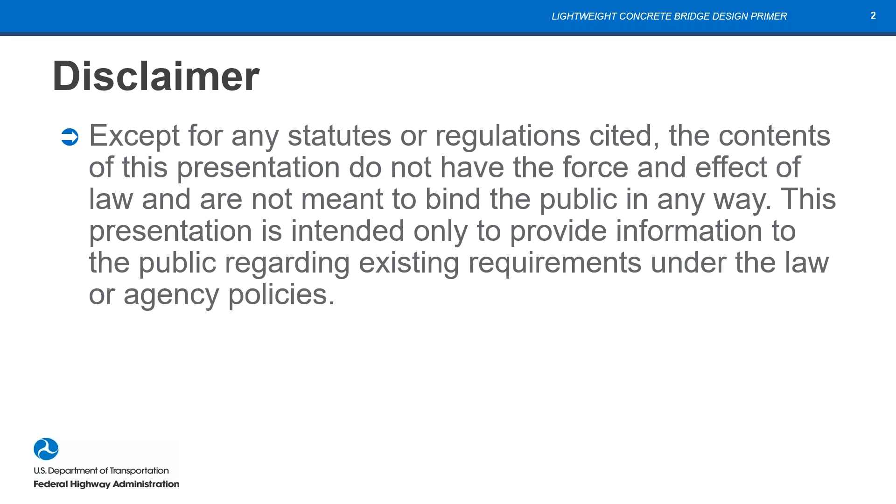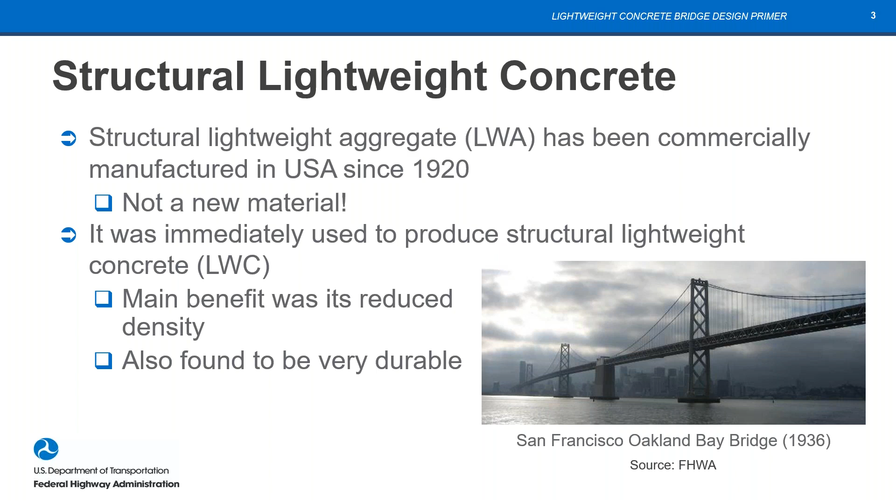So let's talk a little bit about lightweight aggregate. It's a manufactured product, so this is not something like lava rocks that you might have in your grill outside, where they just dig it out of the ground and crunch it up, and that's what you get. In this case, what we're talking about is a raw material that's either shale, clay, or slate. You may have to blast it and get it out for the harder materials, but clay, they can just dig it up.

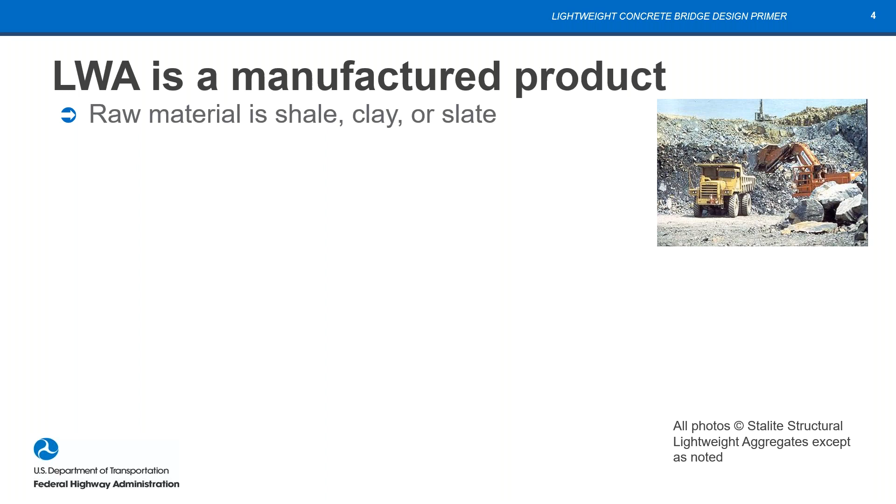So you use those as the raw materials, and then we heat them in a kiln. You can see the rotary kilns indicated by the arrows there. There are a couple of them at each side. Those kilns have the raw materials coming in from the top end, and it rolls down to the bottom.

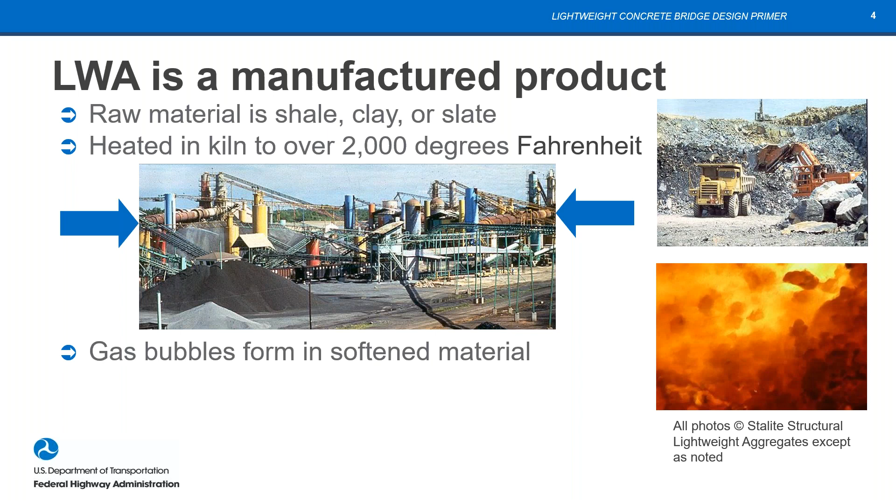They're over 2,000 degrees Fahrenheit down at the low end where the flame is. So the material's getting heated up. It softens, doesn't melt, but it softens, and gas bubbles form in that material as it's softened, and then the gas bubbles remain after cooling.

And you can see them here. It's a porous surface that you can see on the aggregate particles. The clinker is then typically crushed and screened. So that's how we get our lightweight aggregate.

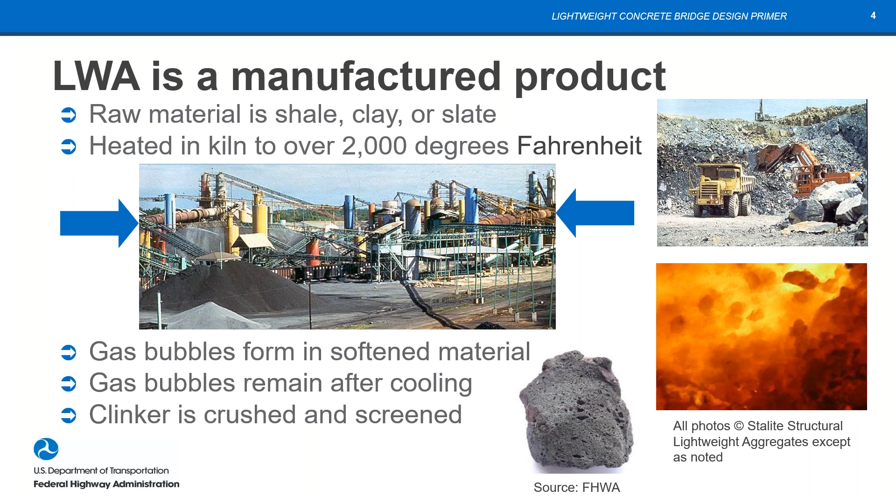Lightweight aggregate was developed back 100 years ago, and the process was patented. Then in the 1950s, that patent expired. At that time, the use of lightweight concrete and lightweight aggregate increased rapidly as other manufacturers came in.

The rapid growth continued well into the 70s, at which point we had an oil crisis. With the heating that was required for the aggregate to be manufactured, that meant the price went up on what was being used, either oil or coal.

The Environmental Protection Agency also began working in those days, and pollution controls were then being required to be placed on the kilns, and that increased production costs. So things changed markedly in the 70s, and there was a significant contraction in the market.

About half of the deliveries went away, and as a result, industry production was reduced, promotion was reduced, and then it became sort of constant at that lower level, and we really didn't have much production or promotion of the material after that point. Prior to that time, they had a newsletter and a lot of things where a lot of information was going out about lightweight concrete.

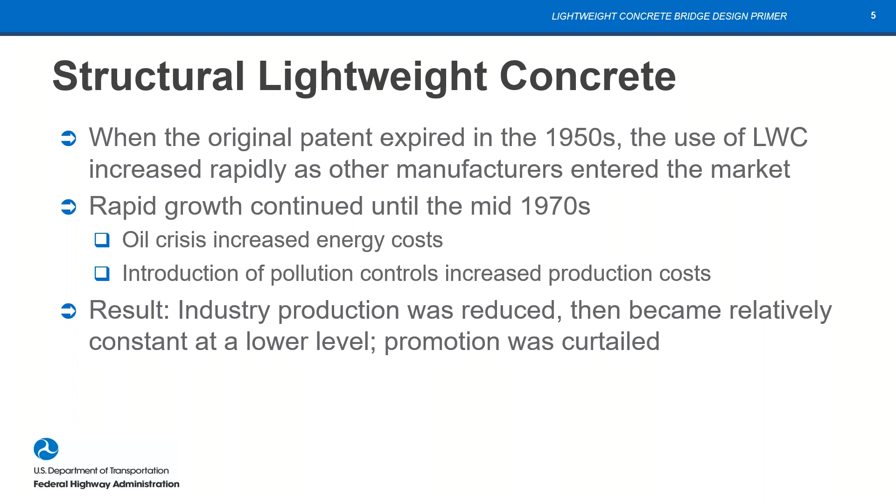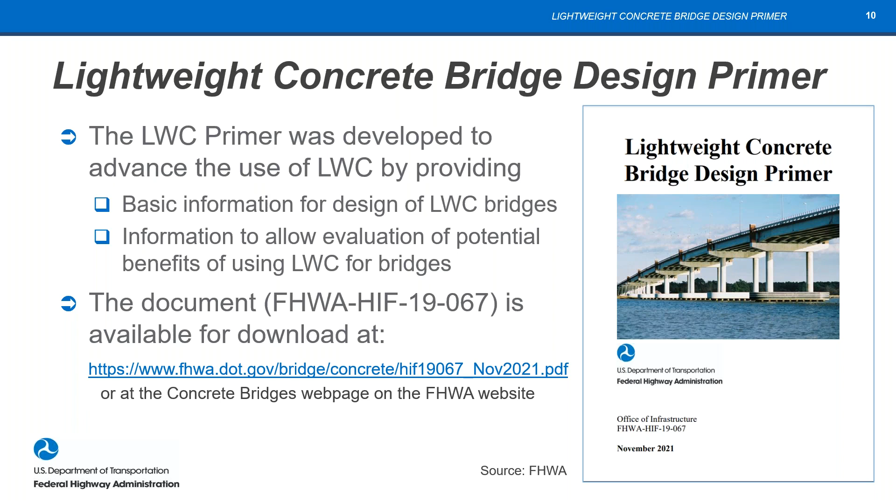So it's a bit longer than what you might think of for a primer. It's about 133 numbered pages, but there was just too much good information. I've been collecting information about lightweight concrete for a good while, and I wanted to share it, so I put more in here than normally we'd have, but hopefully it will be of value to you and others over the years.

I'll spend a little more time on chapter 7, where I'll introduce a few of the bridge projects for which lightweight concrete has been used successfully. I won't go into chapter 8 today. Normally I wouldn't anyway, because it's references, but there are over 160 of them, provided to give you more information to supplement the primer. You can chase those down to get more information about the projects or material properties or whatever you're interested in. So I'd encourage you to use those.

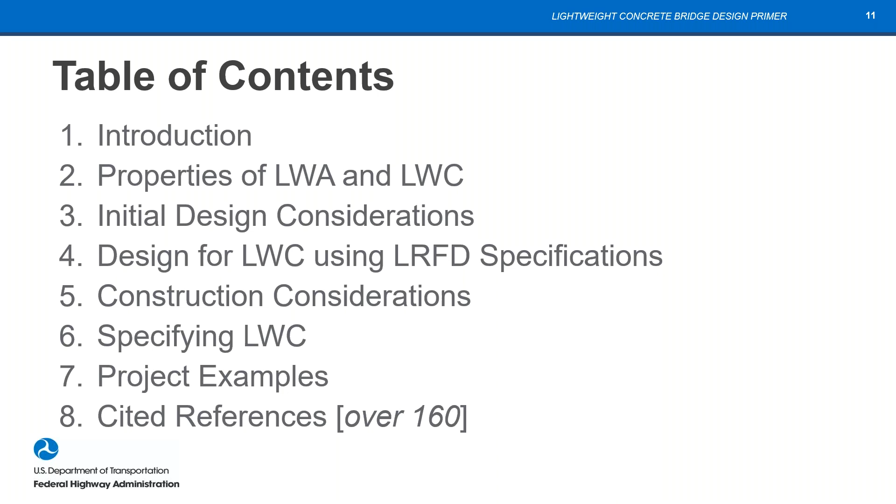So now we'll jump into the introduction.

We've already talked a little about lightweight aggregate and how it's made. As far as lightweight concrete, this is the definition from the AASHTO LRFD: lightweight concrete is simply a concrete that contains lightweight aggregate, conforms to the AASHTO spec, and has an equilibrium density not greater than 135 pounds per cubic foot.

It also gives you the specs used to compute or determine the equilibrium density. Equilibrium density is defined in ASTM C567, roughly, as the density of structural lightweight concrete after exposure to a relative humidity of 50% and a temperature of 23 degrees C for a period sufficient to reach constant mass. So it's essentially a dry density of the lightweight concrete.

What happens is that the lightweight aggregate is pre-wetted before it's batched, so it has extra moisture that can get away. That moisture weighs something, so as it leaves the concrete, if it's not bound in the cement, you get a reduction in density. That's why we talk about equilibrium density. We used to talk about air dry density, but that's not defined in any test methods anymore, so we shouldn't use that term, but rather equilibrium density. That's also discussed back in chapter 6, where it covers the specifications.

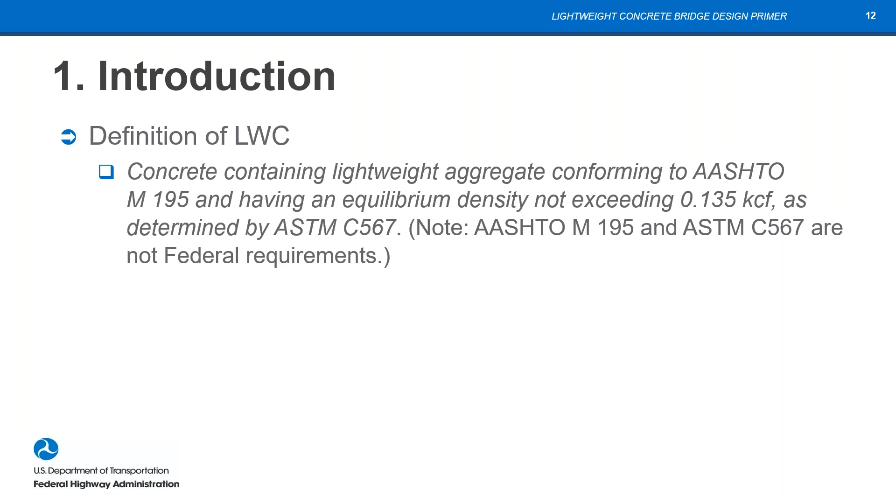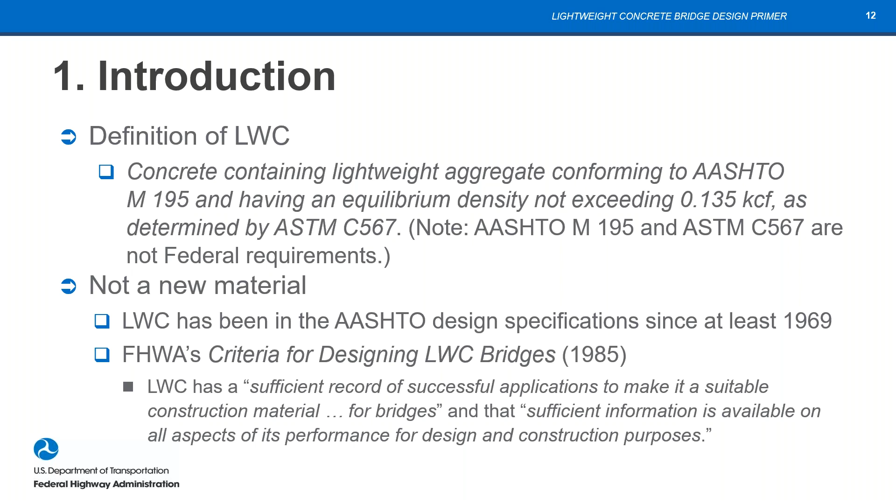Just want to reemphasize that lightweight concrete is not a new material. It's been addressed in the AASHTO design specs since at least 1969. There was also a study funded by FHWA and performed by T.Y. Lin International, published back in 1985. Here's a quote from that report showing that even back in 1985, there was enough information available, and lightweight concrete had been successfully used, so it's a suitable construction material for bridges. That's important and again emphasizes that this is not a new material.

Moving on to topics in chapter 1, there's a list of benefits for lightweight concrete. We start with structural benefits, related to design efficiency for the superstructure and the supporting elements. Examples include extending span ranges, wider girder spacings, and shallower girders. Oftentimes, making a lightweight deck will give you increased spans more than simply using a lightweight girder.

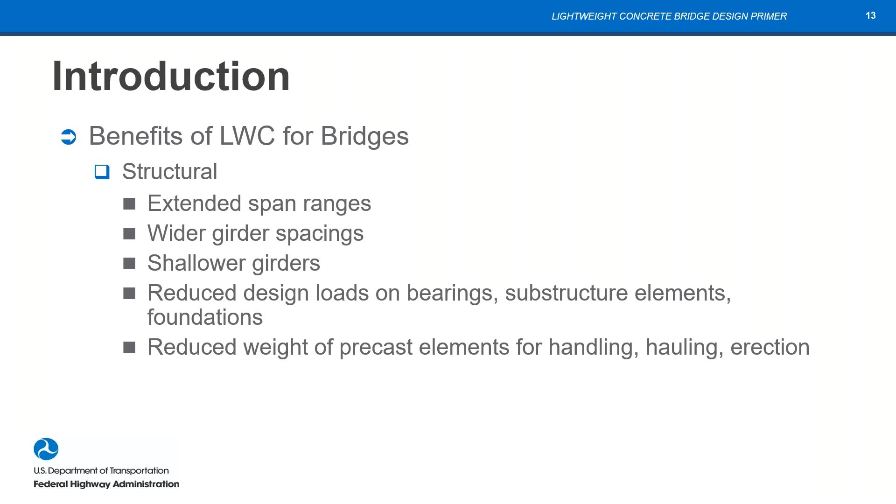Also, we have improved efficiency because of reduced design loads on the bearings, substructures, foundations, and all that sort of thing. Then there are the benefits of moving precast elements—if they're lighter, it's a nicer thing to do. That's another benefit for handling, hauling, and erection.

But then there's something that's a surprise to many engineers: the durability of lightweight concrete is actually enhanced over normal weight concrete, everything else being pretty much the same. It doesn't seem to make sense that taking a rock with holes in it and putting it into your concrete would make it more durable than using a hard rock aggregate, but there are a number of factors involved.

I can't develop all of that—it's a very interesting topic—but one factor is that the lightweight aggregate is typically pre-wetted before it's put into the concrete, which helps with pumping and other things. It also helps with durability because it reduces shrinkage, therefore reduces cracking, and reduces permeability because at the micro scale there's less cracking around the aggregate particles than you'd see in a normal weight mix.

Similarly, the aggregate is less stiff because it has all those holes in it, so you end up with less micro cracking, and less micro cracking around the aggregates means lower permeability. We also have a lower modulus of elasticity that can reduce cracking due to restrained shrinkage, and a lower coefficient of thermal expansion that also reduces cracking—I'll get into that more in a minute. Especially when you combine the lower modulus and lower coefficient of thermal expansion, which happens when looking at, for example, a bridge deck cooling off after it's begun to set, that can significantly reduce the cracking potential from restrained thermal and shrinkage strains.

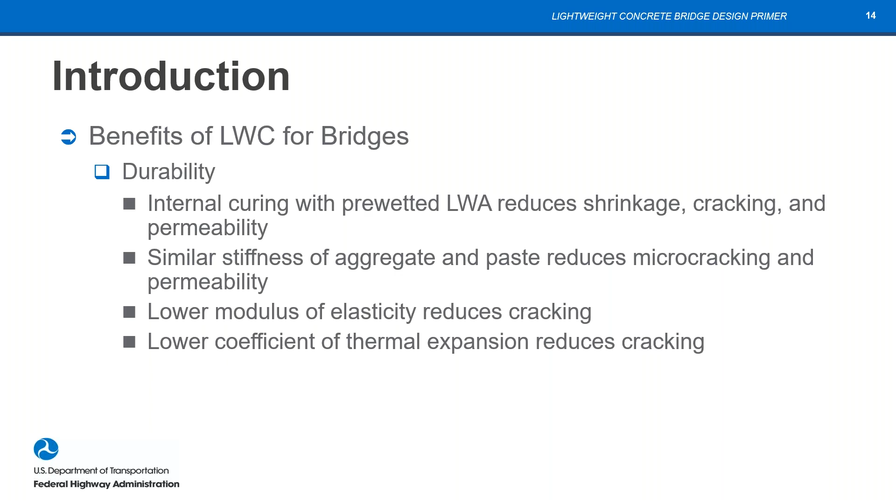There are, however, perceived disadvantages of lightweight concrete, and that's probably why we haven't seen lightweight concrete being used for bridges much more than they are now.

There is the increased cost of lightweight aggregate. You're looking at an aggregate that's dug out of the ground like other aggregate, but then it's fired, and the number of sites where lightweight aggregate is produced is somewhat limited. So there's oftentimes a significant transportation cost involved in getting the lightweight aggregate to wherever you're wanting to make the concrete. People oftentimes think about reduced durability because you've got an aggregate with holes. Surely it can't be as durable. And then you see others, reduced capacity, or probably it must have a reduced strength.

That's not true. And, you know, is it available? And then many contractors are not familiar with lightweight concrete.

However, the fact that we've had many successful projects means that the increased cost is not insurmountable, and other concerns, those listed there, can oftentimes be addressed either in design, or they are simply misconceptions. For example, the reduced durability.

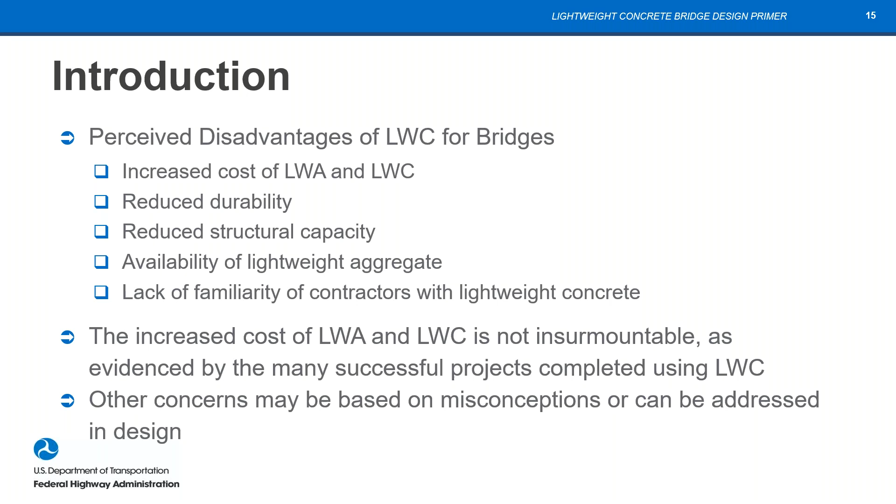I'll give you 3 quick examples of projects on which there's been an effective use for lightweight concrete. One's, again, the San Francisco-Oakland Bay Bridge, another a bridge in Washington State, and finally a bridge in Norway.

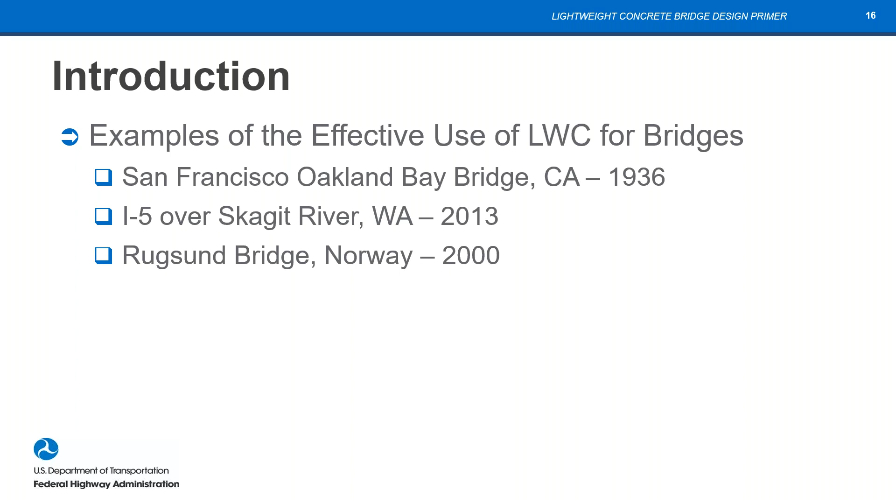There's an article out there by a guy that was involved in the design of this, and he says that using lightweight in that bridge deck saved $3 million out of the original $40 million total cost. That's 7.5%. So it's a significant cost savings for the use of lightweight concrete there.

Then a number of years later, in 1958, the lower deck, which had been for rail and trucks, was reconfigured for the same traffic loads as the upper deck. So it was installed again using all lightweight concrete, and both decks are still in service. Now, both of them have had wearing surfaces on them, but it's pretty amazing that those decks are still in place today.

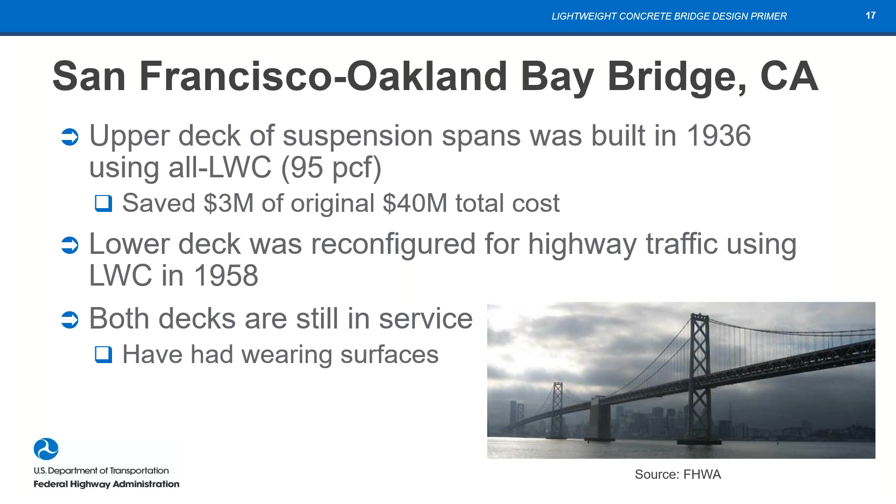Another bridge is the I-5 bridge over the Skagit River near Mount Vernon, Washington, and there was an emergency replacement a number of years back when one of the truss spans got impacted by an overheight load, and it brought down a truss span.

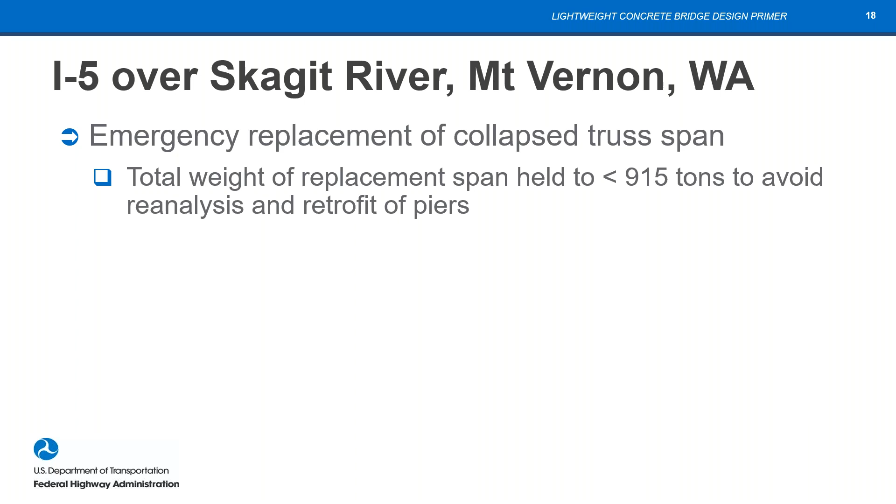The DOT called for an RFP to get it replaced, and said that the total weight of the replacement span, if held below 915 tons, would avoid reanalysis and retrofit of the piers, which is a significant item. So one of the teams proposed using sand lightweight concrete for precast deck girders.

We'll talk about sand lightweight in a minute, but it's not all the way down at all lightweight, it's a little bit more than that, the coarse aggregate's lightweight. So these were the first lightweight concrete girders that had been made in Washington State for the DOT. The design compressive strength of those girders was 9 KSI at 123 pounds a cubic foot.

The actual design strength, if you went through all the ACI statistics, looking at cylinder breaks for a number of projects, it comes in at 10.6 KSI. So that indicates that you can get a high strength design concrete out of lightweight concrete. These girders are 162 feet long. You can see the other details there, but this is a significant project that introduced lightweight concrete up there in Washington State.

Then there's one other bridge I wanted to talk about at this point, and that's the Rugsund Bridge in Norway. It uses lightweight concrete for part of the center span, as an alternate design. There was a design in normal weight concrete, and a peer review process that said you ought to really take a look at lightweight concrete.

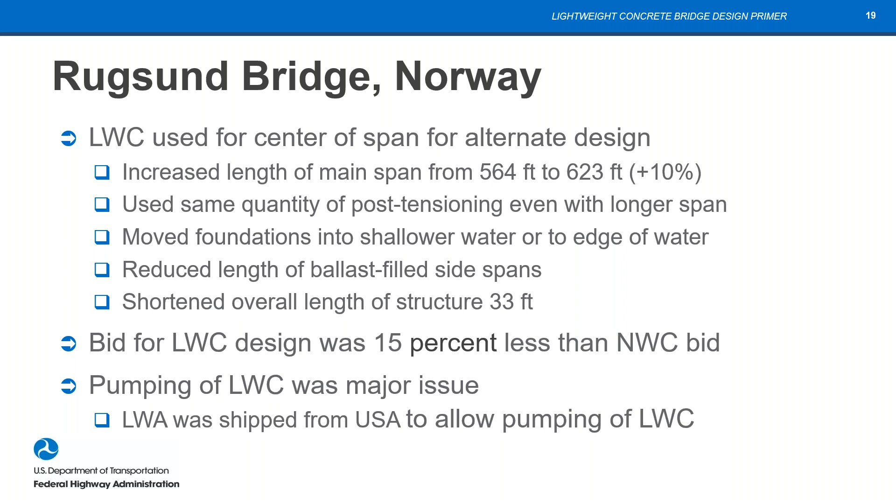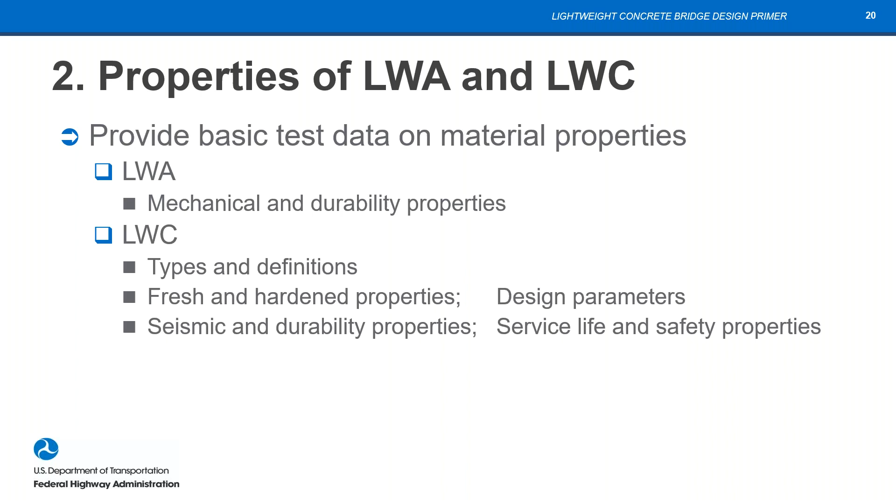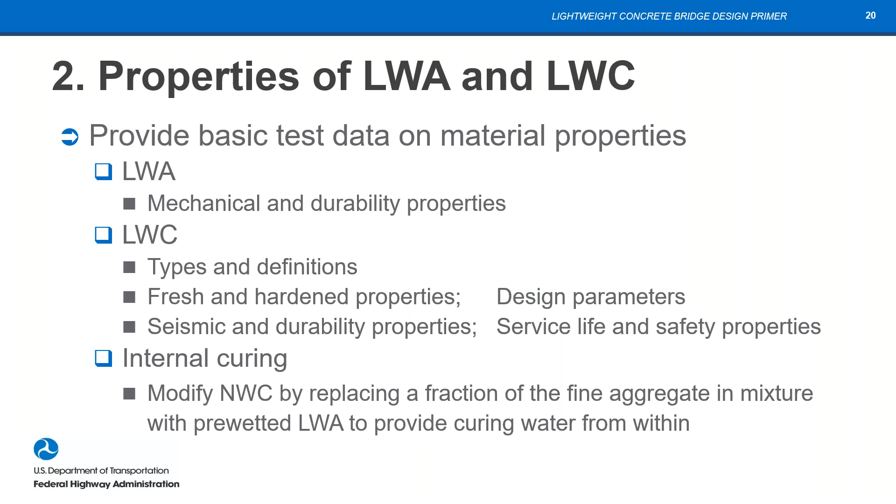So let's move into chapter 2 now and get to the discussion of lightweight aggregate and lightweight concrete properties. We'll begin by looking at the lightweight aggregate properties, and then move on to taking a look at lightweight concrete properties. Finally, we'll have a brief discussion on internal curing, where we're modifying a normal weight mix by replacing a fraction of the fine aggregate with pre-wetted lightweight. Those aggregate particles have water absorbed in them, so as the concrete sets, it pulls the water out of that aggregate and cures the concrete from within, which is a very effective process.

So we have a number of different kinds of aggregate. You can see a picture here from an NCHRP study showing 6 different kinds of aggregate, from different sources like shale, clay, and slate. The properties vary a bit depending on source and processing, just like normal weight aggregate varies from source to source. The lightweight aggregate is typically crushed, but it can be uncrushed. You see in the bottom right photograph an uncrushed, pelletized type aggregate, while this is a crushed aggregate on the right side of that photograph.

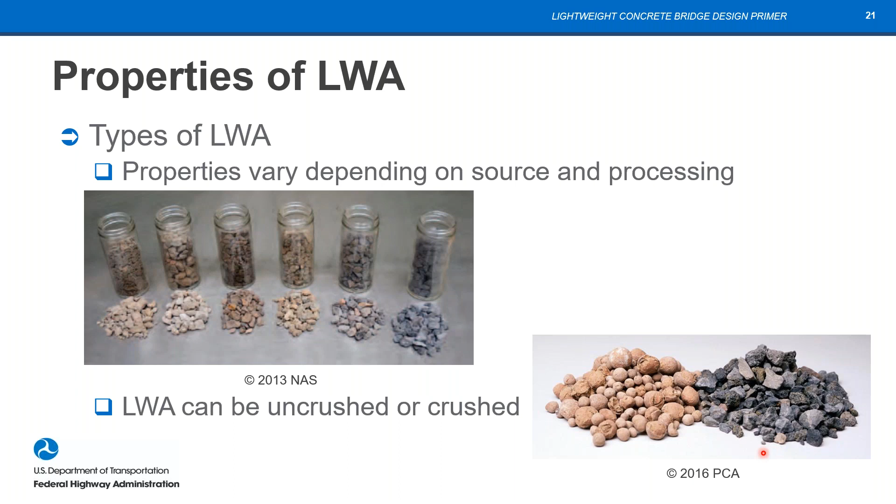The properties of lightweight aggregate, that is the gradation for coarse lightweight, are given in AASHTO M195. This is a chunk out of the table, not the whole table, but it's a piece showing the coarse aggregate gradations. We don't have gradations that are 57, 67s, whatever, that kind of thing. It's just 3/4 inch, 1/2 inch, and 3/8 inch, based on the maximum aggregate size. So there are specifications, just like for normal weight, that specify the gradation and other properties for the lightweight aggregate.

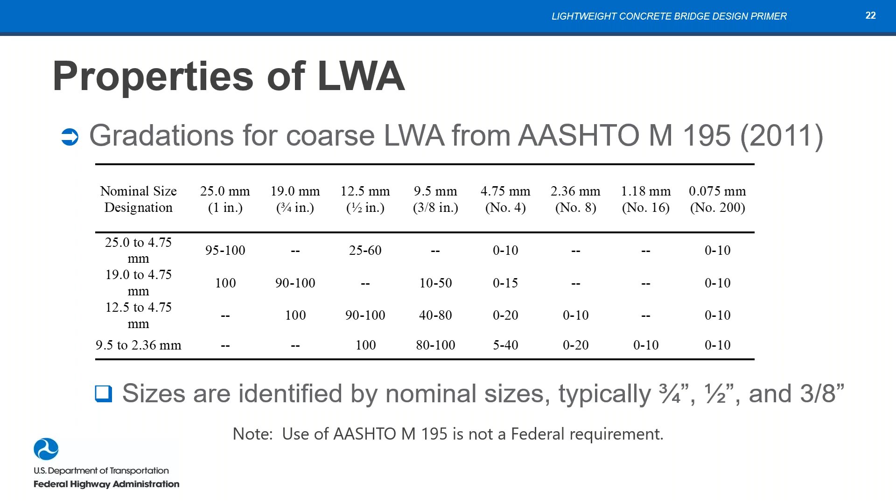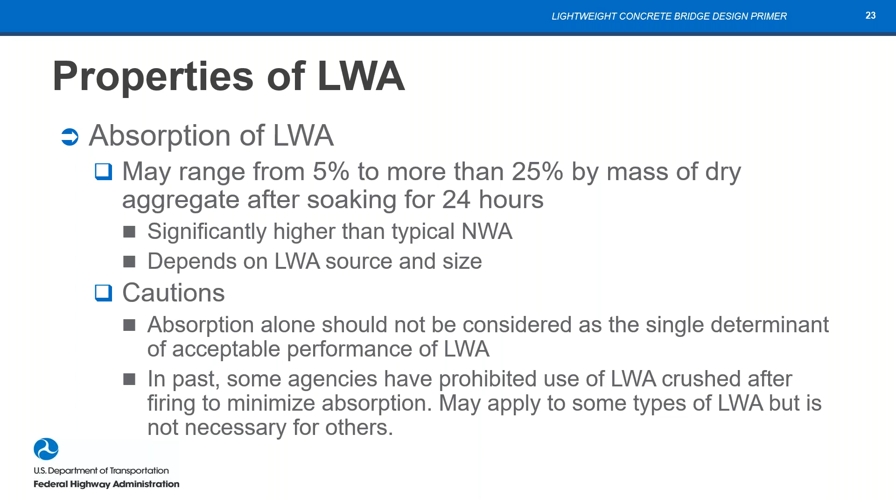There is also a gradation available for fine aggregate. Lightweight aggregate, because it's an expanded rock with pores, has an increased absorption compared to normal weight aggregate. So that absorption may range from 5% to more than 25%, as it says here. It's typically a good bit higher than normal weight aggregate, depending on the source. One caution is that absorption alone shouldn't be the only criteria considered to determine acceptable performance for lightweight aggregate. We need to look at the whole picture. In the past, some agencies may have also prohibited the use of crushed lightweight aggregate. California used to have that in a spec to minimize absorption, but that was for the type of aggregate they had out there. Looking at it nationally, that's not a necessary requirement, and may not even work for that one. But at any rate, it's not something we want to do. So those are some cautionary statements there.

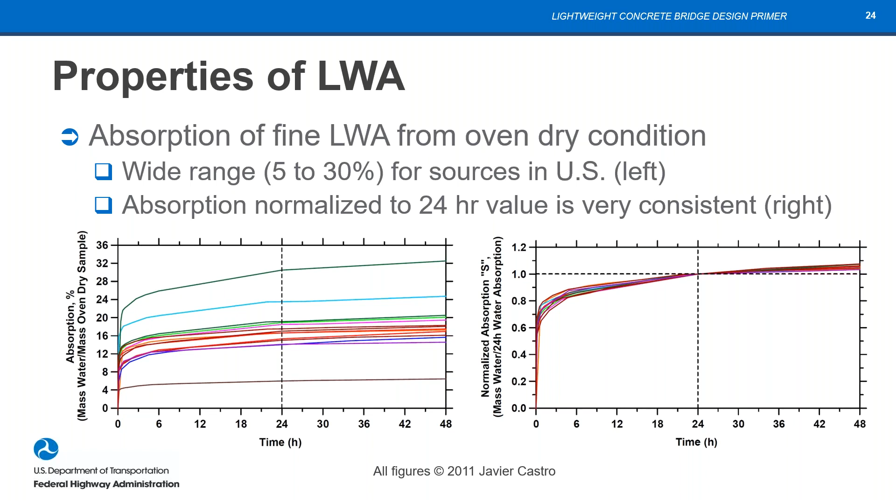Absorption of lightweight fines are shown here in two figures. On the right figure, it shows the mechanics of the absorption are essentially the same. Let's go back to the left figure, which shows the range in absorptions. The bottom line, after 48 hours, 2 days being soaked, is somewhere in the neighborhood of 6-7% absorption, while the top one is up over 32% absorption. So there's a fair range, with a middle ground where most of the aggregate types are. But if you normalize them all by their 24-hour absorption, you see that they all pretty much have the same shape, so they're behaving quite similarly with respect to the rate at which they take up water. The absolute quantities are different, but the relative quantities are the same.

Typically only 20 to 50% of the pore volume of an aggregate particle will be filled. What that tells you is that those pores are disconnected, bubbles totally surrounded by rock, so water can't get to them. We don't really reach a saturated condition, so we don't call it that. We use 'wetted, surface dry' instead. That's just something to be aware of, that the empty pores don't all fill up with water when you soak lightweight aggregate.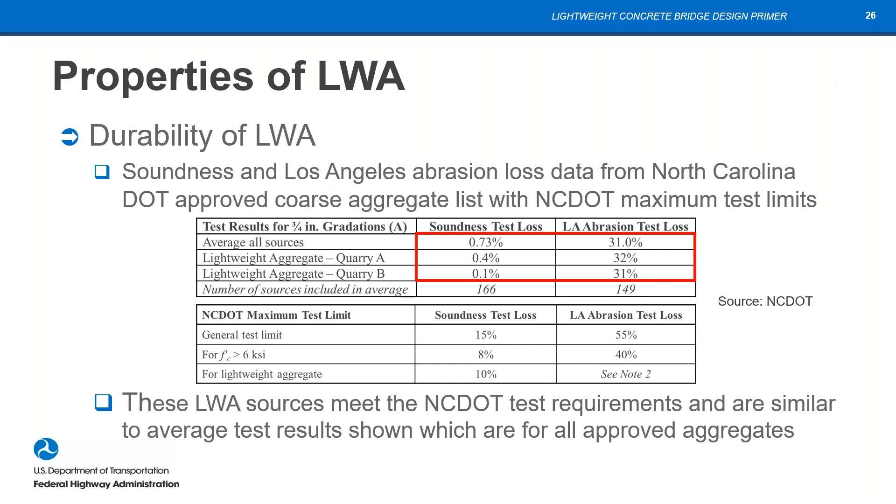There are several types now as we move on into lightweight concrete, having been talking about aggregate up to this point. We'll begin with definitions of types of lightweight concrete. First, all lightweight concrete, where all of the aggregate is lightweight aggregate. Sand lightweight concrete sounds a little backwards, but it means the coarse aggregate is lightweight and normal weight is used for the fines, the sand. Then there's specified density concrete, which is any blend of normal and lightweight aggregates to obtain whatever density you want to achieve.

The all-lightweight and sand-lightweight definitions were in the specifications up to the 8th edition, where they were dropped, and now we simply specify the density of lightweight concrete, and the supplier determines the blend of aggregates to achieve it.

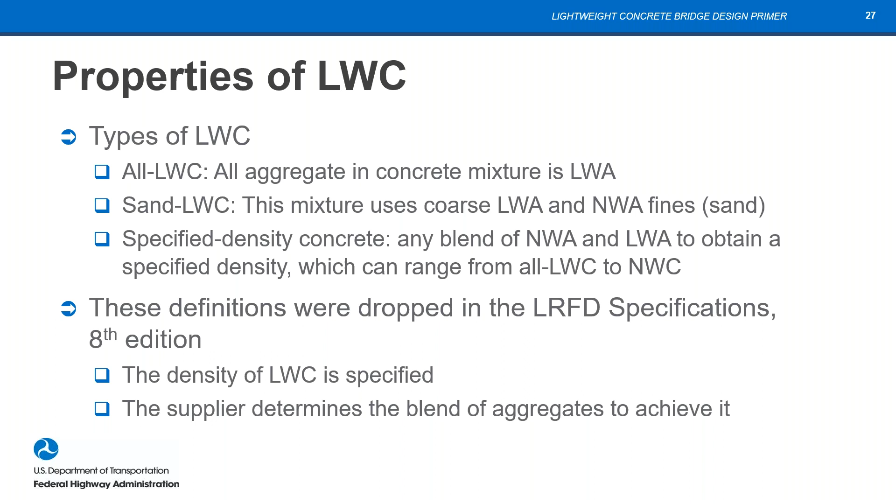There are also two types of density we need to use wisely when specifying densities for lightweight concrete. The first is fresh density, the density of concrete in its plastic state when it comes out of the chute or the end of the pump line. That's used for acceptance at delivery. But we also want to know what it's going to be like a little later after it dries out some.

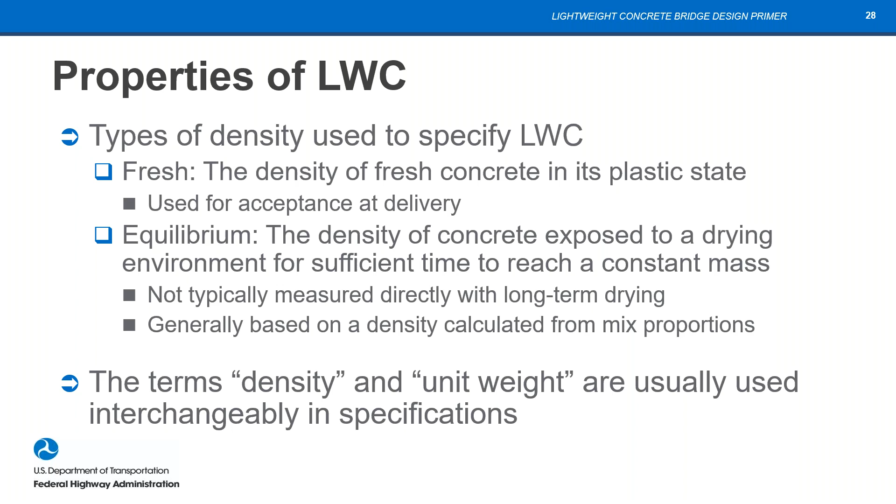It turns out our mixes oftentimes, being higher performance mixes, don't dry out as much as perhaps a mix used for an elevated slab in a building, so we don't have as much change to reach equilibrium conditions as those other mixes. At any rate, as I read the definition earlier, the density is the density of concrete exposed to drying to reach a constant mass.

The primer discusses different densities that may be achieved, although it can vary with the type of lightweight aggregate used to some degree. The lower the density, the lower the compressive strength that can be achieved. That's even acknowledged in the LRFD for normal weight concrete.

But the strength of lightweight tends to be a little bit more sensitive to the change of densities. You can get down into the 95 or 90 pounds per cubic foot range with an all lightweight mix. And that would include air, which we're using to reduce the density also. That's how we get to the lowest densities, with all lightweight.

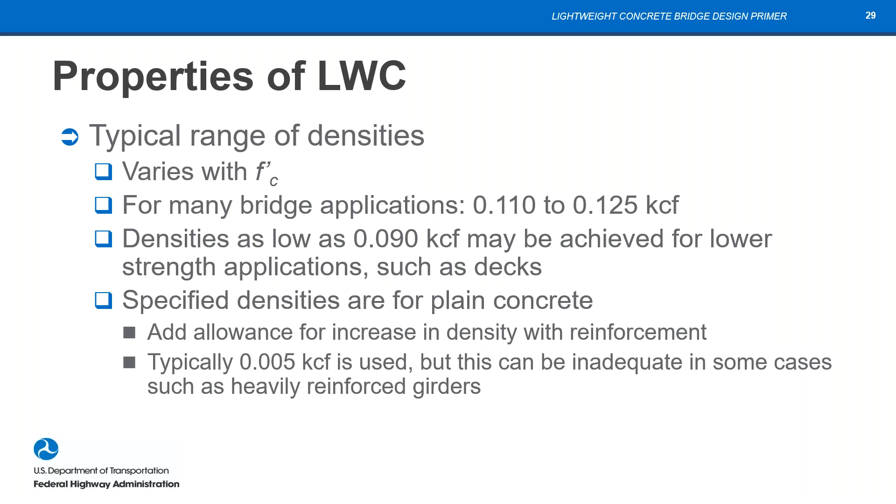Then we have to add an allowance for increase in density with reinforcement, which is typical for normal weight concrete as well. But what about the hardened mechanical properties? Some tests do show that lightweight has a reduced mechanical property compared with normal weight. But in some cases, lightweight can have properties similar to, or even greater than a comparable normal weight mix.

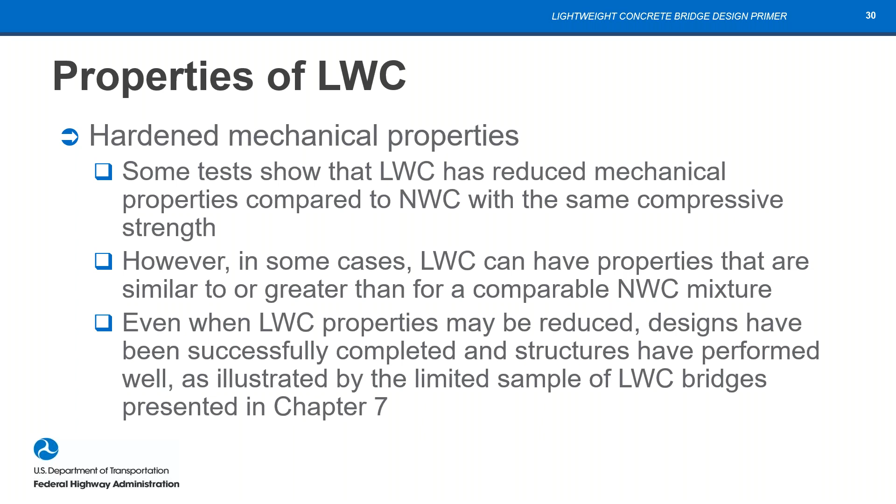Oftentimes, even if a lightweight concrete property may be reduced, we can modify our designs in some way to deal with that. One thing is, for example, a research test where they keep all the parameters the same and just swap out the rock. You're going to have a lower strength in lightweight concrete than in normal weight - not a lot, but some reduction. In production, out in the real world, you would just bump up the cement content a little bit for the lightweight, and you'd end up with the same compressive strength. So that's just something to bear in mind.

Looking at lightweight concrete decks, we can typically use the same compressive strength that we use for normal weight decks. That's easy, no problem to achieve for a lightweight deck. In a few cases, people have increased the lightweight concrete strength because they think that we have a reduced tensile strength for lightweight. That's a possibility, but we'll see some data that refutes that later on.

For girder concrete, 28-day compressive strength can be 8 KSI or maybe even up to 10 KSI. And in some cases, this is just a little caution here too - some researchers have reported that they can't achieve higher strengths with some lightweight aggregates, but sometimes they don't have as good an understanding of how you work with lightweights as some of the suppliers for lightweight aggregate. So I would encourage you all to consult with lightweight suppliers when considering the higher compressive strengths and see what they think about how to achieve that.

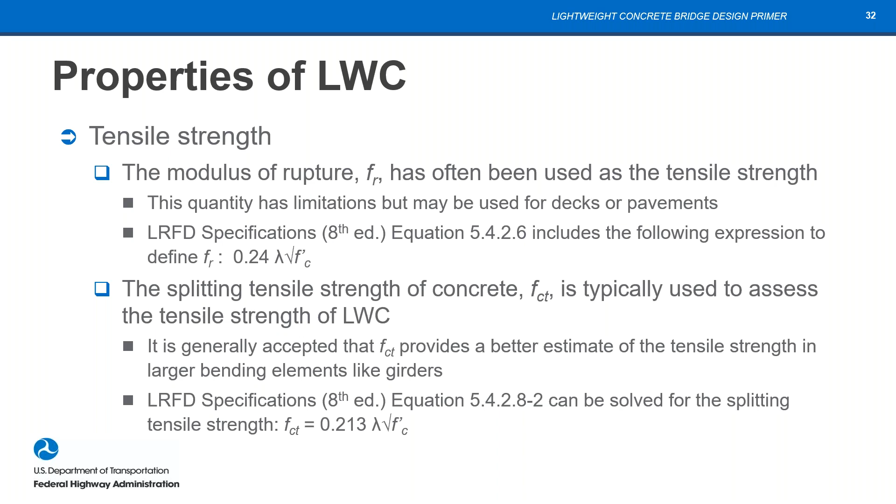As far as tensile strengths, modulus of rupture is often used as the indication of tensile strength. But what we find is that instead for lightweight concrete, we typically specify the splitting tensile strength of lightweight concrete. One thing you do see is we have a concrete density modification factor, the lambda term, that was finally - well, back in 2015 - added into the specs. Prior to that, it was simply stated in text prior to the equation, but now the lambda has been added into all the equations where it belongs. So I would encourage, if you're looking at tensile strength, that you would use the splitting tensile strength rather than the modulus of rupture. Here's some example data on tensile strength for lightweight concrete.

Here we have a normal weight mix that used river gravel, and then we had lightweight mixes that used 3 different types of lightweight raw materials. This is the splitting tensile strength that was measured, the compressive strength, and then the ratio. Oddly enough, if you look at this - and this is essentially the expected splitting tensile strength for normal weight concrete in the denominator - of these 4 specimens, the only one that came in under the expected for normal weight was the normal weight concrete. All of the lightweight tensile strengths were higher than would be expected had the normal weight concrete equation been used. So this is where I'm saying that while people think lightweight always has a reduced tensile strength, it's just that the specifications have allowed or provided a modification in case they were.

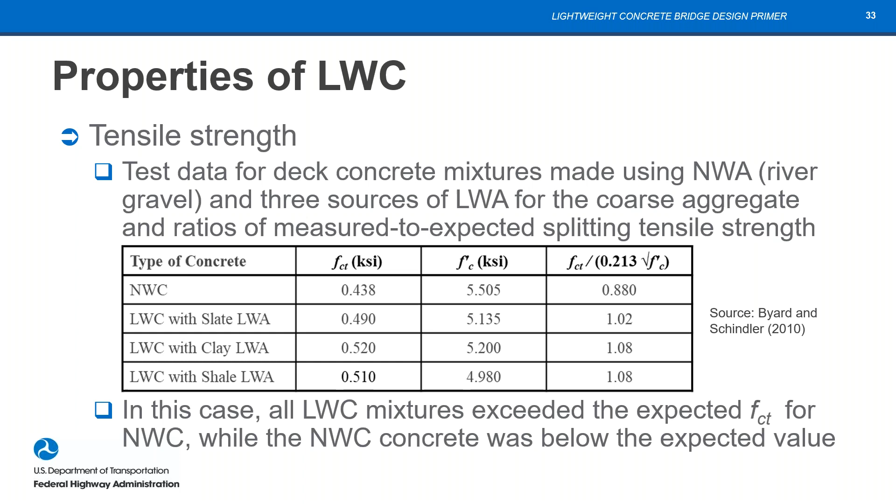And we've just all come to use the 0.75 for all lightweight and 0.85 for sand lightweight, but that's not really the case. So I would encourage you to look into that and think otherwise if you have opportunities where that might make a difference. As far as compressive strength, the strength gain with time is similar for lightweight, and the stress strain curve is typically linear, a little further up than normal weight, but we haven't really quantified that very much.

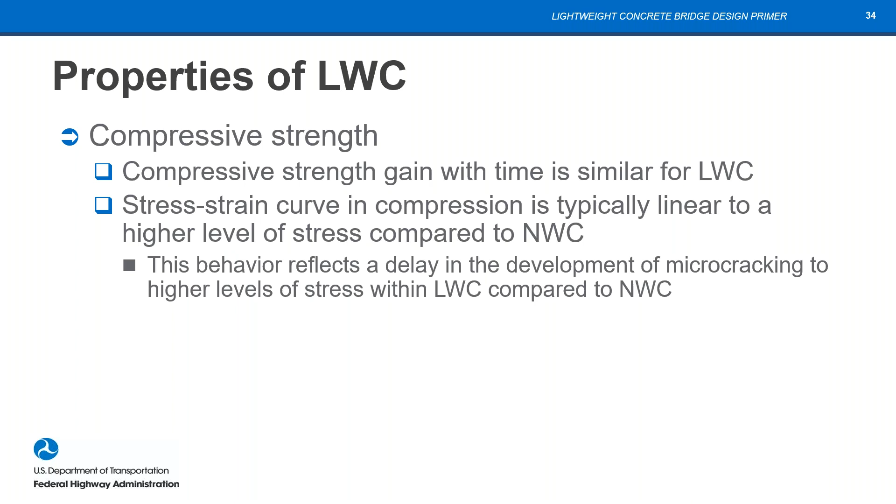As far as modulus of elasticity, the lightweight concrete is less stiff than most normal weight concretes. There's an equation in the code that came in 2015 that's better calibrated for higher strengths as well as for lightweight concrete.

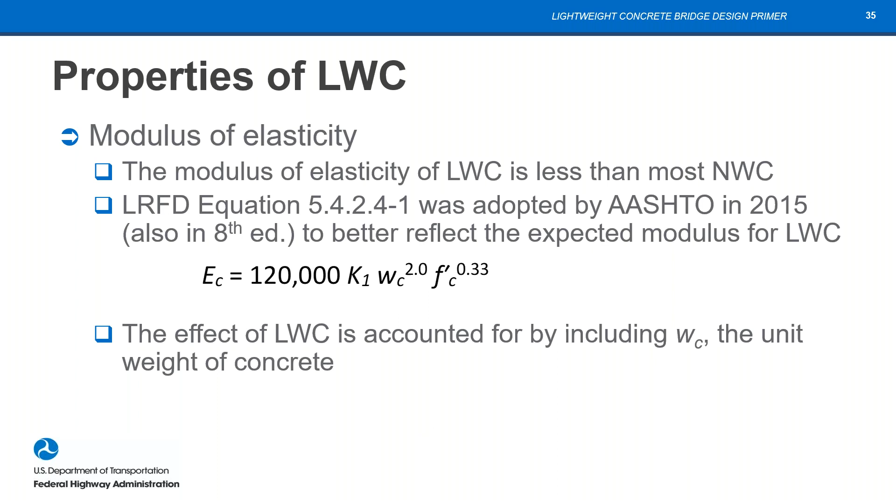And we have the unit weight that's in there, as it has been for many years, but in a different equation now. This is an interesting set of data coming from pre-stressed girders up in Washington State.

You're looking at creep on the left and shrinkage on the right. The red lines are for lightweight concrete, the green lines are for normal weight concrete, and you see that in both cases the creep is less for lightweight than for normal weight concrete, and on the right the lightweight concrete is less than the normal weight as far as shrinkage.

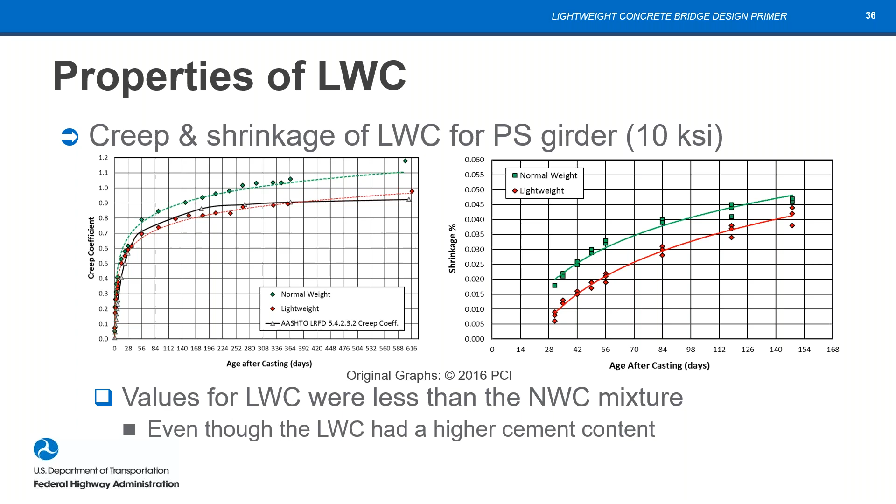That's very surprising because the lightweight concrete actually has about almost 25% more cementitious material in it than the normal weight, yet it has reduced shrinkage. That's probably due to reduced autogenous shrinkage from internal curing. That's probably the main thing going on there. But it's very surprising, and it's clearly demonstrated here, repeated with other data.

So creep and shrinkage are not typically greater for lightweight concrete than they are for normal weight.

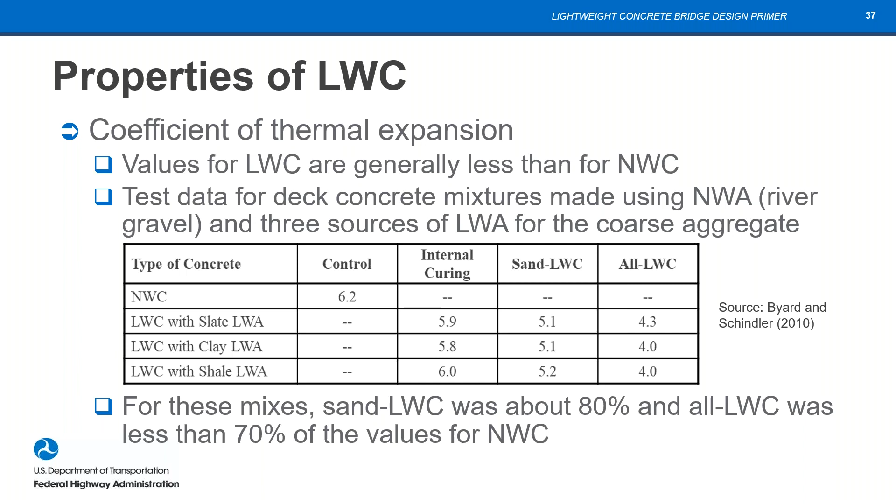A point we don't often spend time talking about is the coefficient of thermal expansion. Lightweight concrete values are typically less than for normal weight concrete, as you can see here on the chart. This is again deck concrete mixes. As far as design parameters, they are discussed in the primer.

One thing we oftentimes discuss with lightweight concrete is whether the pre-stress losses are different. Well, what some of the testing has shown is, yes, the elastic shortening is greater because you have a reduced modulus, but there's not a significant difference between the creep and the shrinkage. We just saw that it could even be less for lightweight concrete. So we can use the equations that are in the specifications.

Camber will typically be greater because you have less dead load and a lower modulus, so the camber typically can be more. We may be able to mitigate that in our designs if we choose to. But otherwise, we use the requirements in the LRFD specs for our design without any problem.

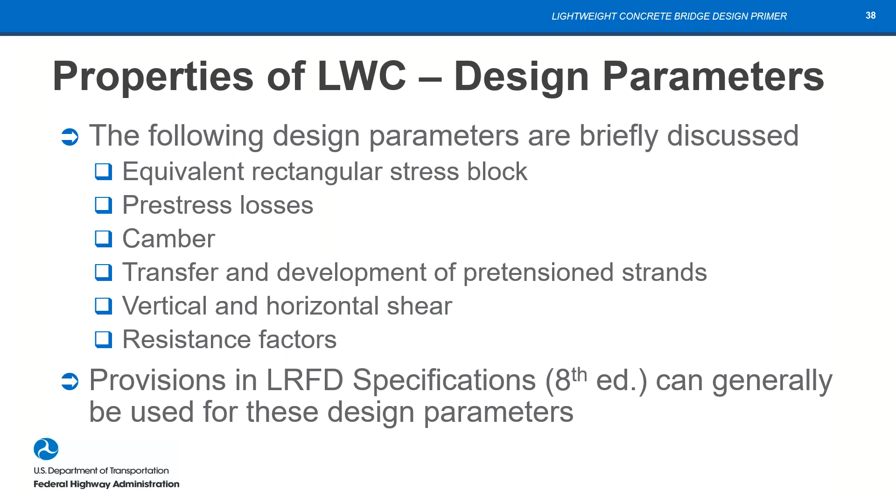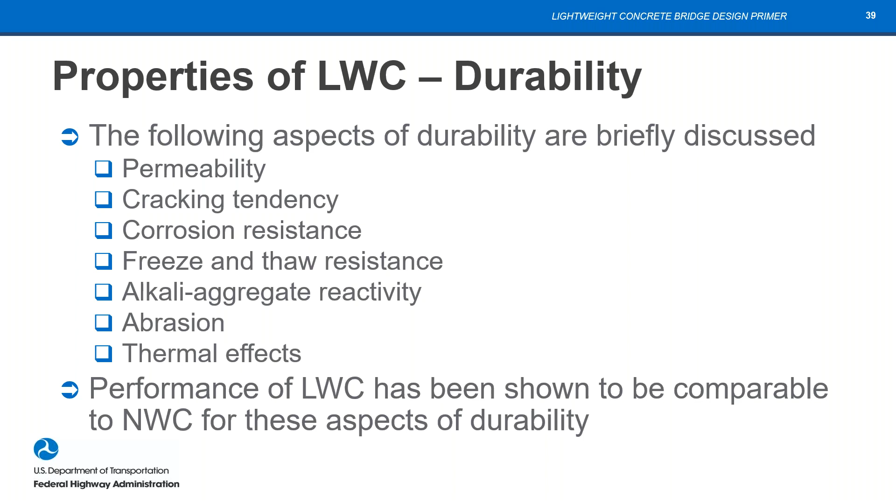The primer also discusses a number of aspects of durability. You can see them all listed here. Typically, the lightweight concrete can be shown to have comparable durability to normal weight. We won't be able to go into that in further detail.

Again, there's some discussion of internal curing, which I've already mentioned. The New York State DOT has a specification now that allows a reduction even in the required duration of wet cure if you have internal curing with lightweight aggregate in the deck concrete. Also, any lightweight concrete using pre-wetted lightweight aggregate will provide internal curing.

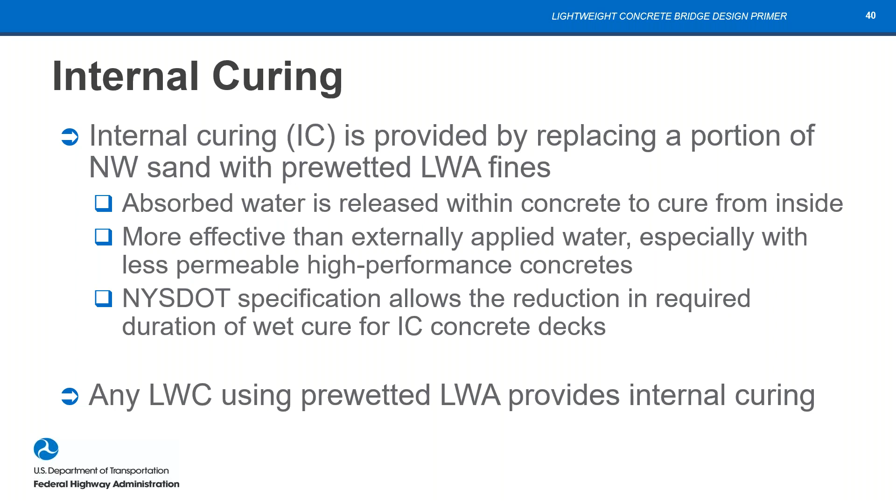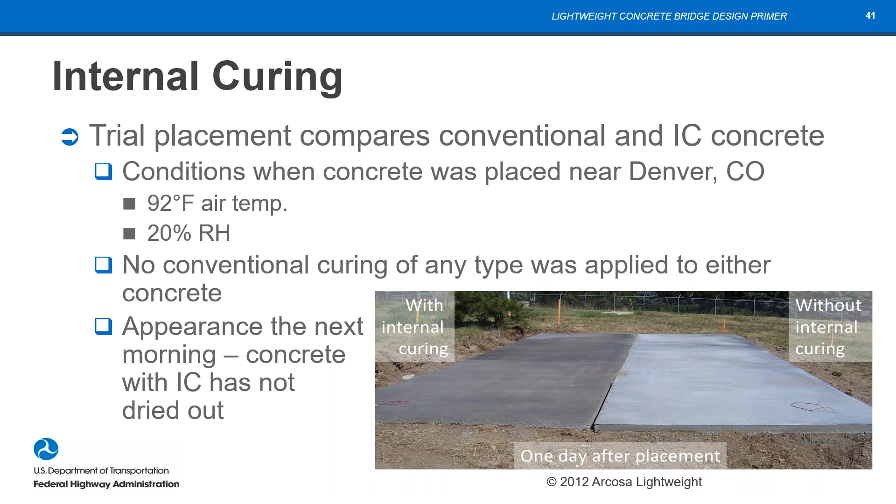The concrete on the left has internal curing in it. The concrete on the right does not. No conventional curing of any type was applied to either concrete, and this is what they looked like the next morning when they came out and looked at them. There's no sprayed curing compound or anything on these. The internal curing concrete is clearly still moist, while the conventional concrete has dried out at the surface, which makes it more prone to shrinkage cracking and such.

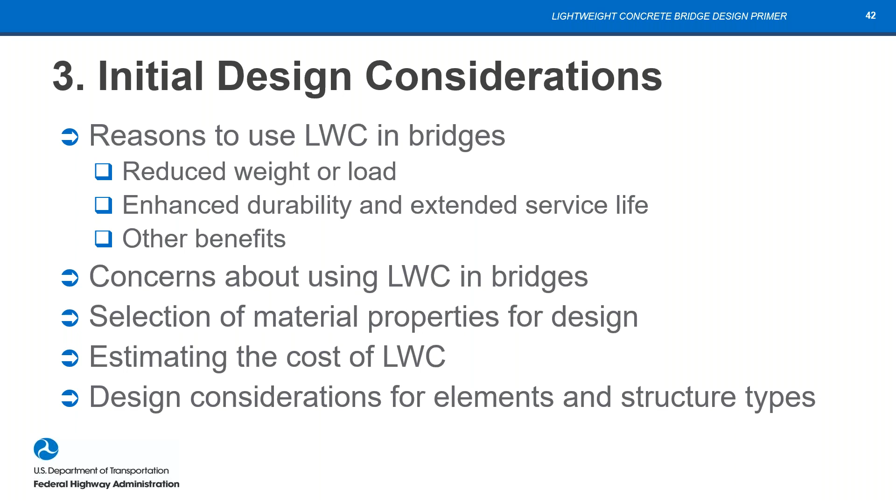Now we're ready to move on to the next four chapters in quick succession with just one slide for each. Here we are looking at Chapter 3 on initial design considerations. As designers, we have to understand what numbers to use in design and why we would use lightweight. You can see the list of what needs to be considered here. I won't go into details—you can look at those in the primer.

Chapter 4 is a much more detailed look at the LRFD design specifications and what they say about lightweight concrete. There's also a discussion of recently adopted changes related to lightweight. And there were some additional changes, not discussed so much in the primer, that were identified as I was writing this, that have now gone back to AASHTO, and they've made a change that will be coming out in the 9th edition.

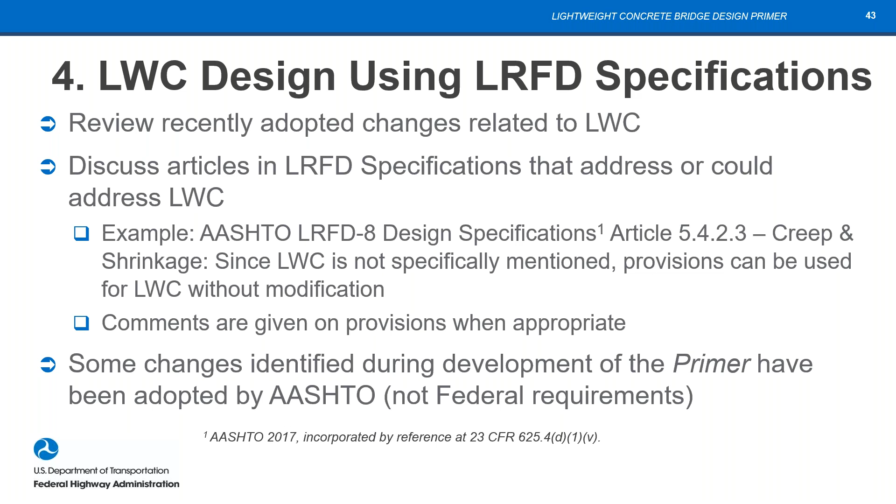There's a chapter on construction considerations with topics related to construction, you can see them all here. There's also a section on internal curing.

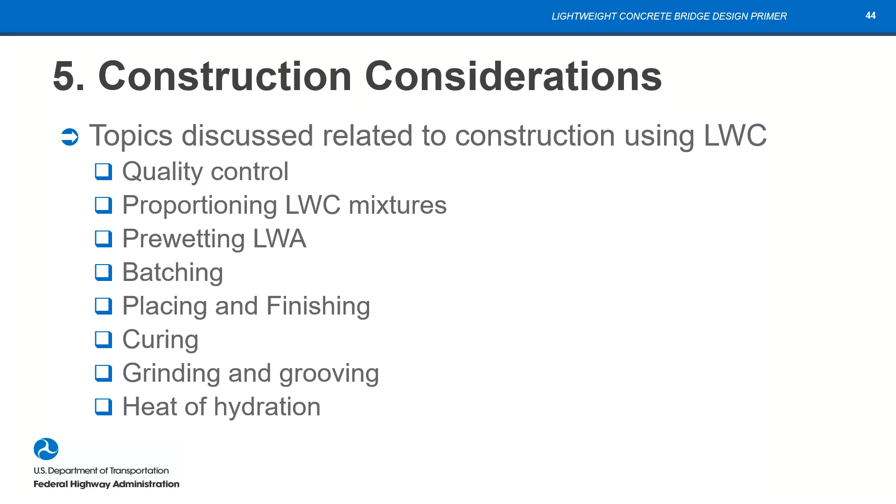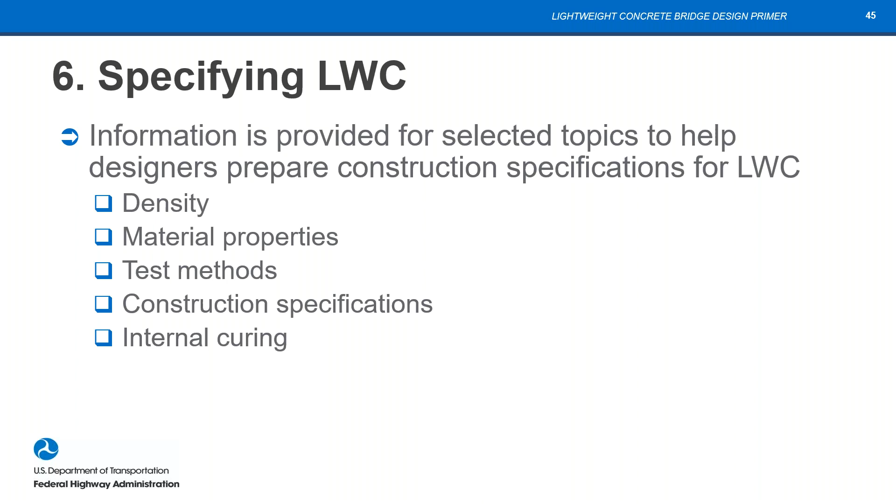There's a chapter on specifying lightweight concrete, because this is very important. If you're going to build something out of lightweight concrete, we have to specify it, especially since many DOT standard specs don't include all the information or test methods required for lightweight concrete. There's not a lot of differences, but there are some important things that need to be added.

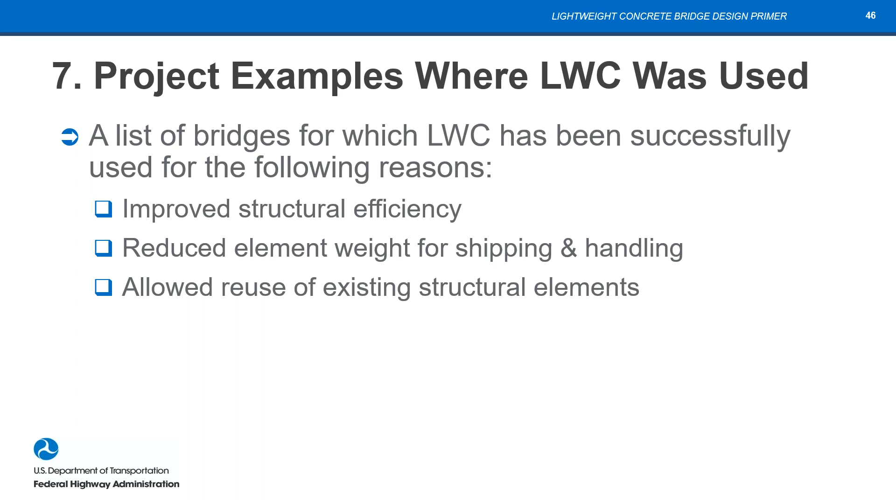So we finally get to Chapter 7, the project examples, where we have a list of different bridges for which lightweight's been used successfully for 3 reasons: improved structural efficiency, reduced element weight for shipping and handling, and allowed reuse of existing structural elements. I think we're going to cover those in reverse order. We do have a wide range of bridge projects, large and small, short and long spans, new and old, different parts of the bridges, mostly superstructure.

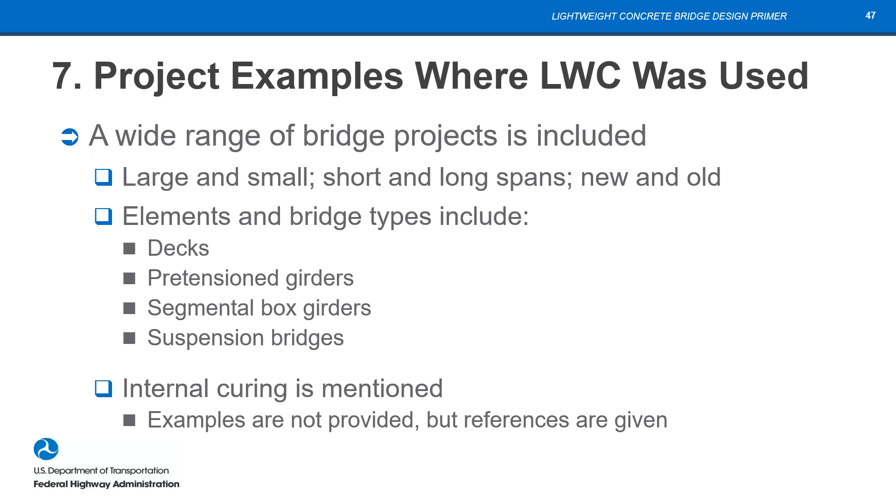We don't go into internal curing examples, however, in Chapter 7.

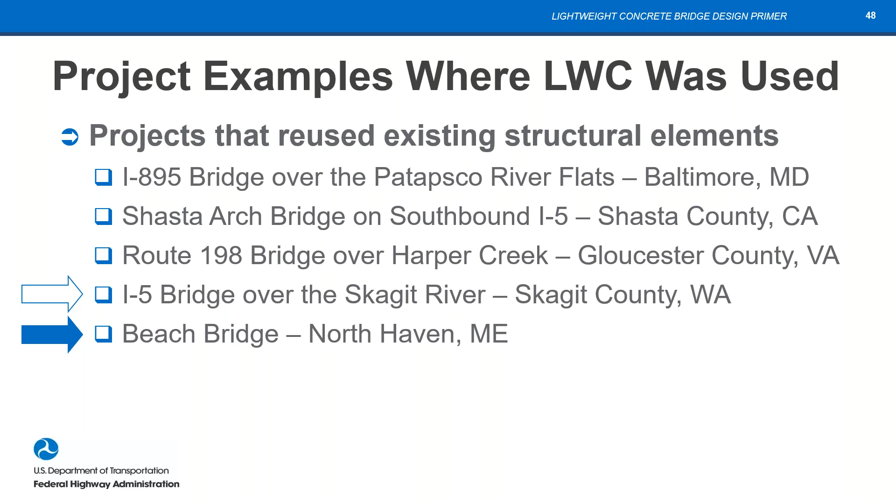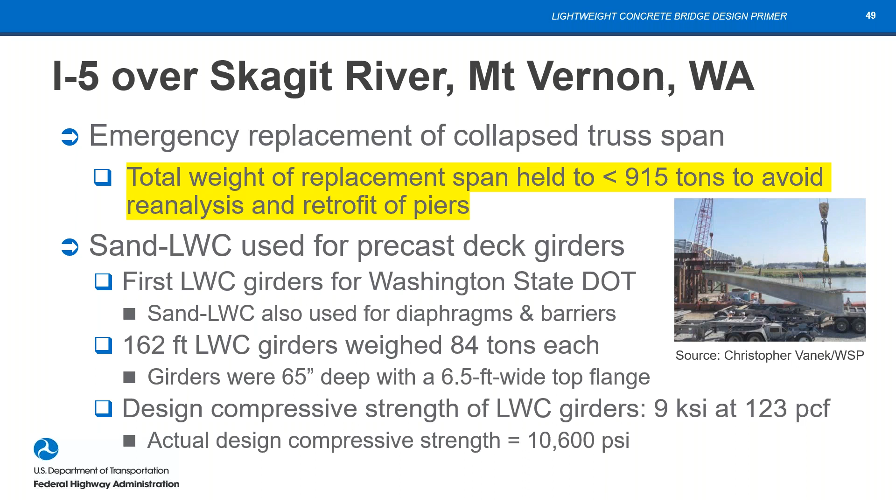So here we start out by looking at projects that reuse existing structural elements. There are 2 of them here, the I-5 bridge and the beach bridge. I'll have a slide for each, and the only point I'm really wanting to make is that lightweight concrete was used here because it kept reanalysis of the piers out of the picture. They kept the weight of the new superstructure small enough that there was no reanalysis, redesign, or retrofit required for the piers, which is a significant issue.

The beach bridge was just a short bridge with about 56 and 39 foot spans, 2 spans, but it was in a situation where it would not be easy to replace the piers. So using the lightweight concrete next beams made it work out well, and they could reuse the substructures.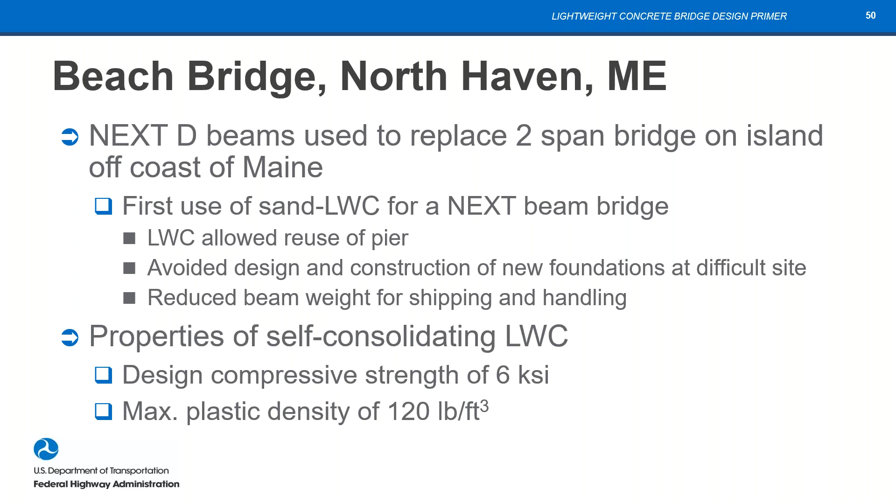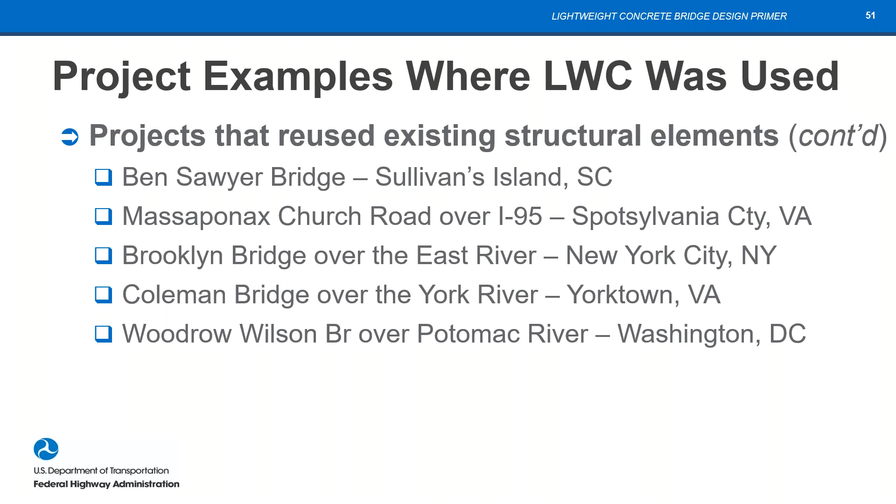There are a couple of other bridges. You see the 5 more here for which information is given in the primer, where the existing structural elements or substructures were reused.

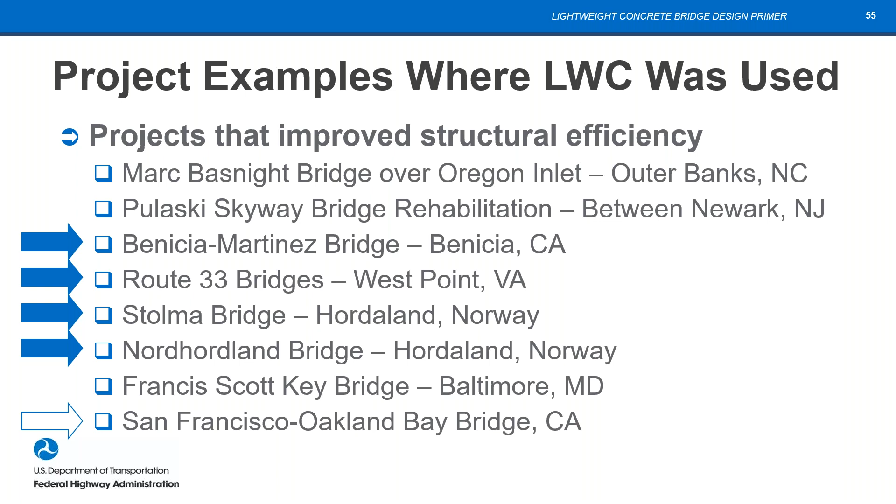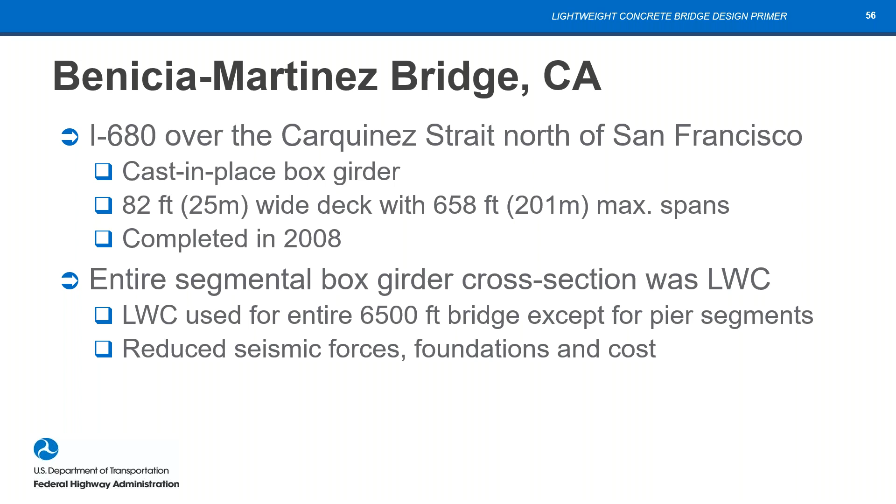The Benicia Martinez Bridge, a major bridge just north of San Francisco, California. It's cast in place box girder, has a total length of 6,500 feet, but a maximum span length of 658 feet or 201 meters. Lightweight concrete was used for the entire box girder section, except for the pier segments, in order to significantly reduce the seismic forces from the mass of the superstructure, which then affected the foundations and therefore the cost.

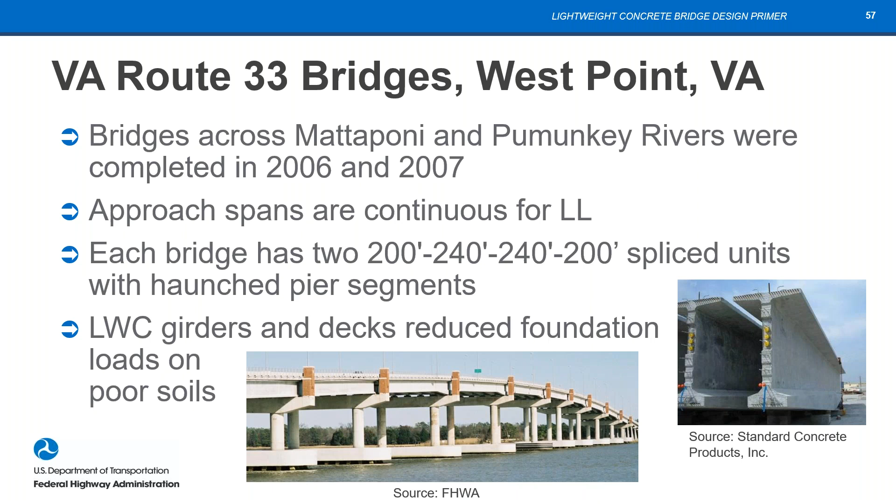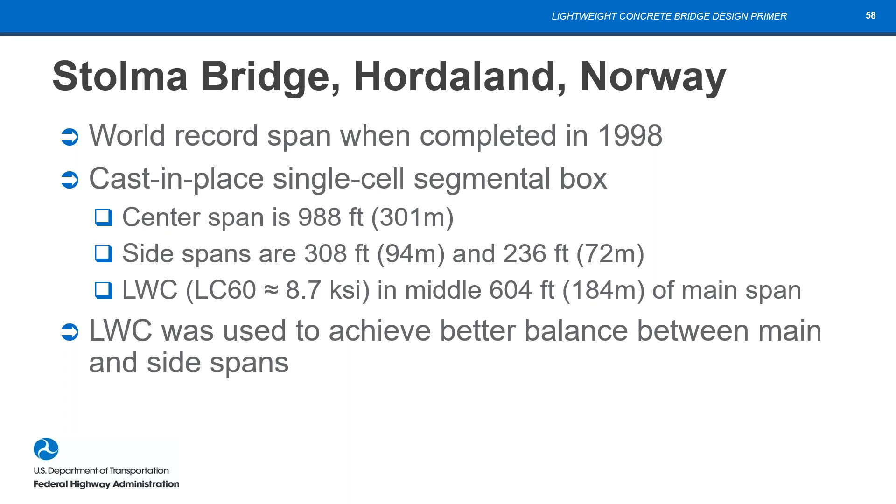Here's one of the world's longest spans, if not the longest, segmental box girder cantilevered construction span. The center span is 988 feet, with 2 side spans. Lightweight concrete was used out in a section of the main span in order to reduce the weight of the main span to better balance the design with the short side spans.

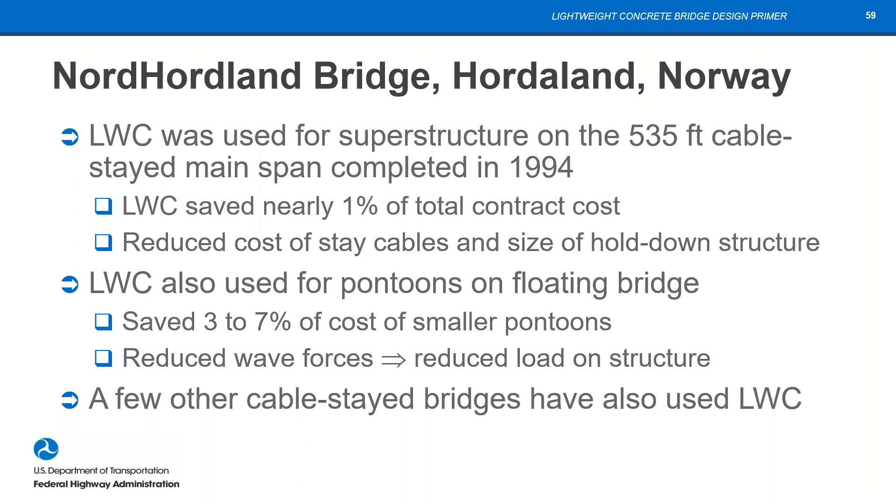Then here's another bridge that's a little different, a cable stayed bridge, again in Norway. It has a cable stayed portion and then a floating bridge portion. Lightweight concrete was used in the main span of the cable stay to reduce the cost of the stays, and it was also used for the pontoons, which reduced their size and saved a significant amount. A couple of other cable-supported bridge structures have also used lightweight concrete.

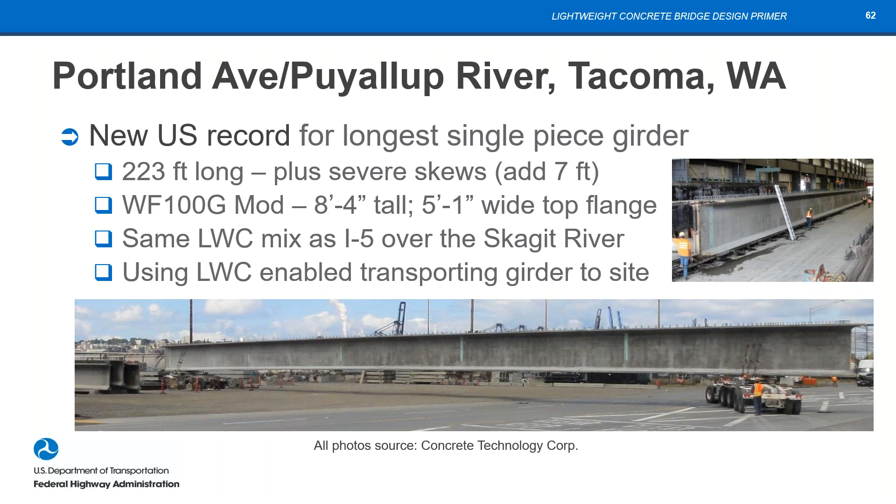What about projects that reduce the weight for shipping and handling? We see the Portland Avenue bridge in Tacoma, Washington here. This bridge needed to go only about 6 miles from the plant, but in order to be able to ship it, they needed lightweight concrete because the girder is 223 feet long, one piece - really 230 feet because it has terrible skews on both ends, so point to point it's 230 feet. So lightweight was just used here to transport the girders to the site.

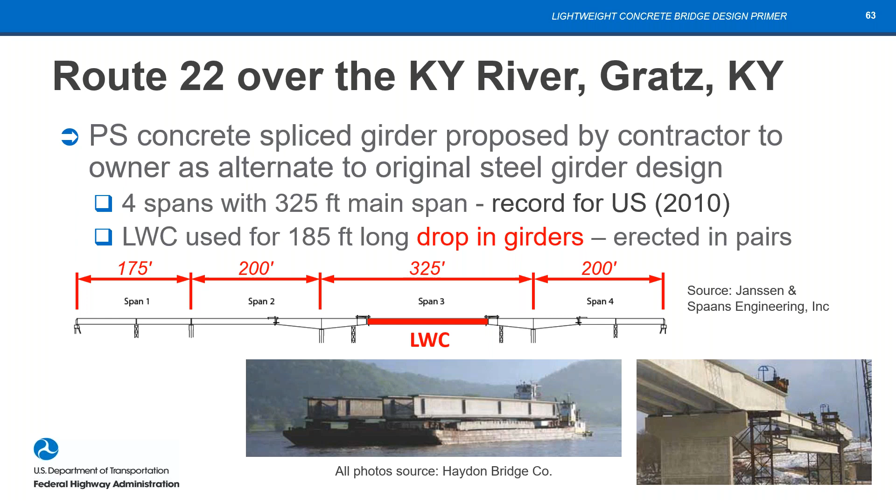And here's the record span for spliced girder bridges, where the drop-in is lightweight concrete. You can see them on the barge in the bottom photo, and then being erected using strand jacks, being picked up two at a time in the right photo.

And with that, we're at the end. I hope that this presentation's exposed you to some new information about lightweight concrete. It's not a new material. It's been used for over 100 years now, that it has advantages for all types, even parts of concrete bridges, that the design procedures are well developed, and it has already been used in a wide variety of bridges, and that information is available to assist regarding construction issues and specification development. The document is posted on the FHWA Concrete Bridges webpage.